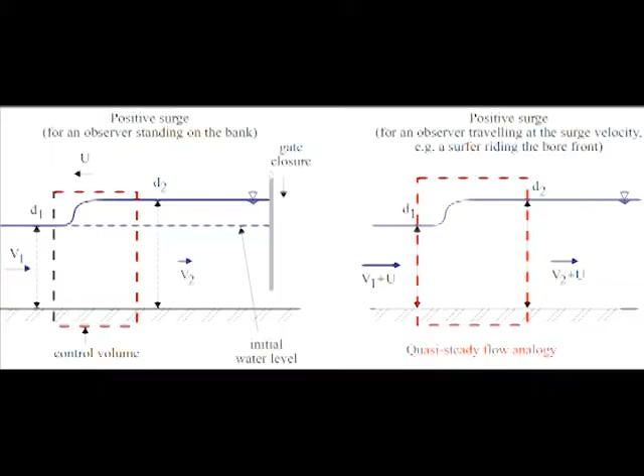may be analyzed as a quasi-steady flow, considering a positive surge propagating upstream against an initially steady flow, for example following downstream gate closure. The surge is an unsteady flow for an observer standing on the bank, on the left, but it is seen by someone traveling with the surge at the celerity U as a steady flow, a quasi-steady hydraulic jump.

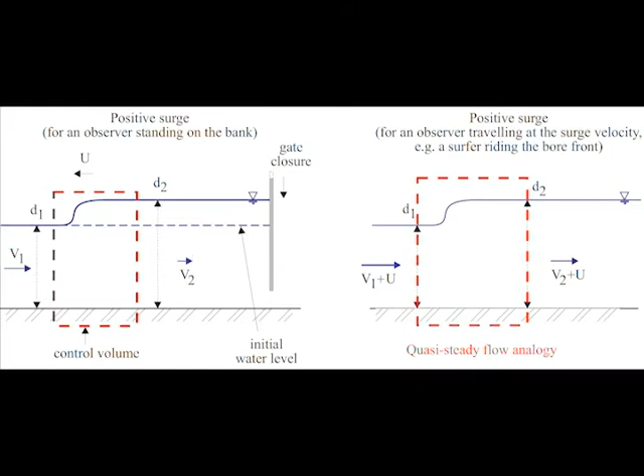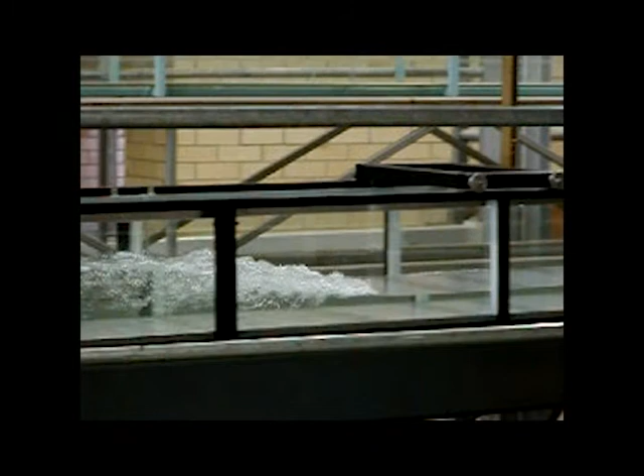The quasi-steady flow analogy is illustrated in the following short movie in a laboratory. In this laboratory experiment, the last frame of the movie shows a side view of the positive surge, which is nearly identical to a side view of a hydraulic jump.

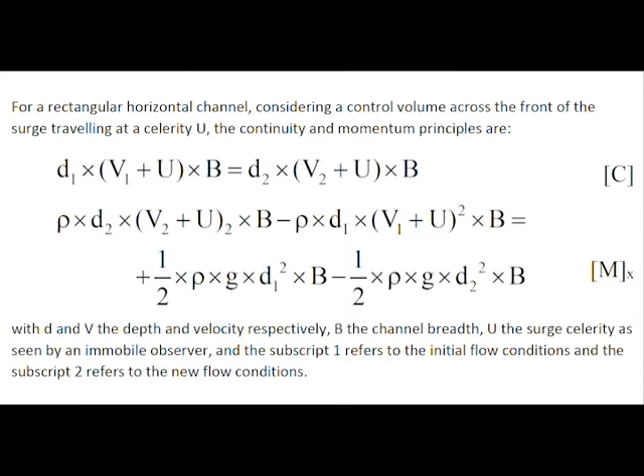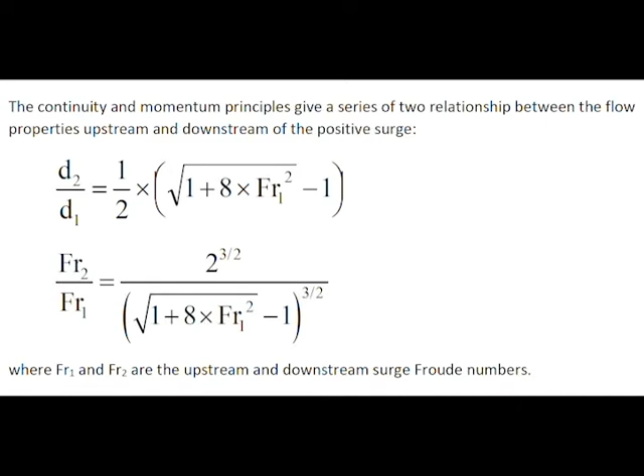For a rectangular horizontal channel, considering the control volume across the front of the surge traveling at a celerity U, the continuity and momentum principle can be developed. They give a series of two relationships between the flow property upstream and downstream of the positive surge, that is the flow property before and after the bore. In this relationship, the Froude numbers are defined in terms of the surge propagation in using the relative surge celerity.

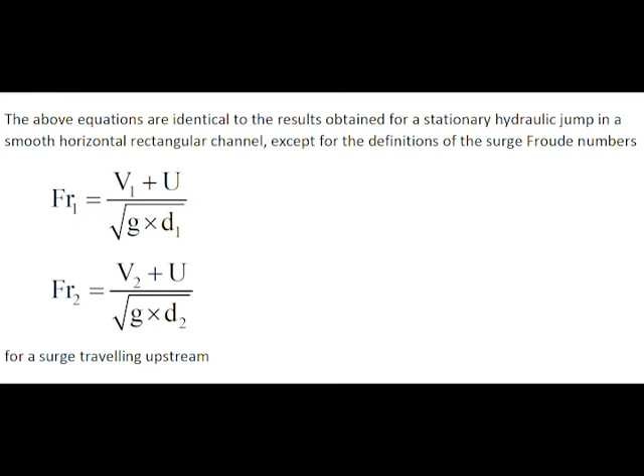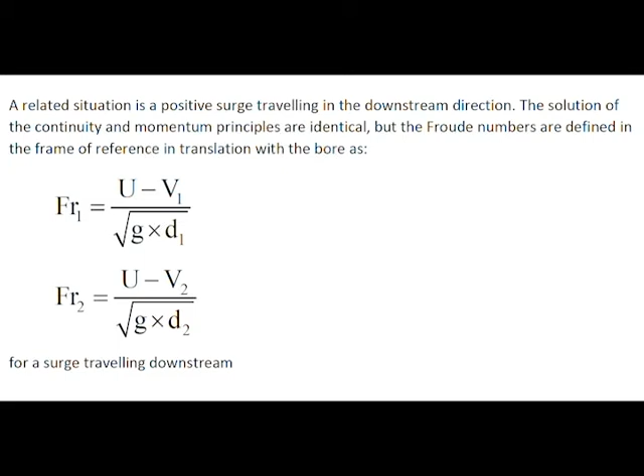A related situation is the positive surge traveling in the downstream direction. The solutions of the continuity and momentum principle are identical, but the definitions of the Froude number are corrected to be defined in the frame of reference in translation with the surge.

The continuity and momentum equations give a system of two equations with three unknowns: the new flow condition, d2 and V2, and the surge celerity, U. A further equation is required, that is a boundary condition, for example, the new discharge after gate closure.

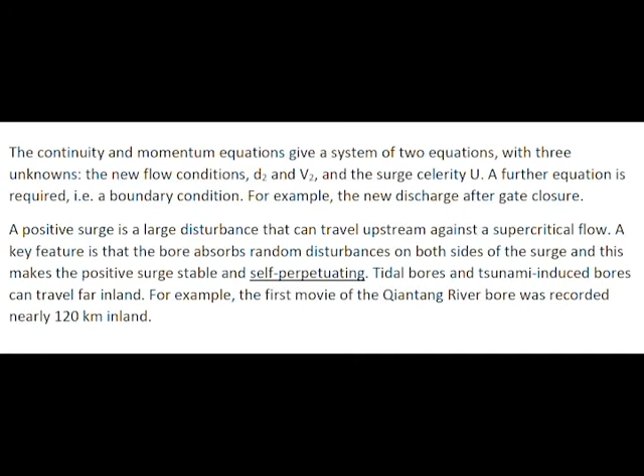A positive surge is a large disturbance that can travel upstream against a supercritical flow. A key feature is that the bore absorbs random disturbances on both sides of the surge, and this makes the positive surge stable and self-perpetuating. Tidal bores and tsunami bores can travel far inland. For example, the first movie of the Qiantang River bore was recorded nearly 120 km inland.

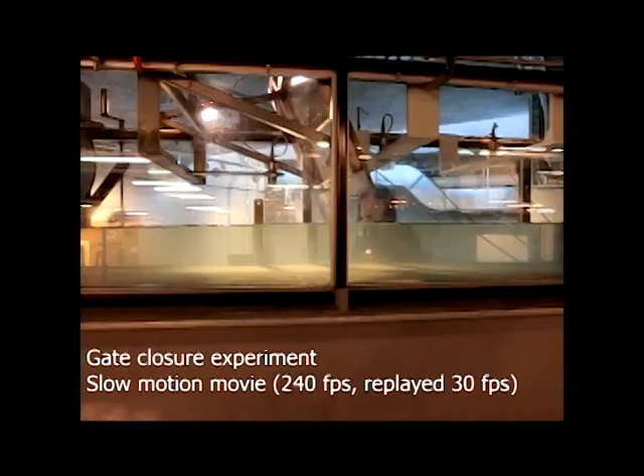The above development assumed an idealistic positive surge generation. In practice, the generation of the positive surge traveling upstream is a very turbulent transient. It is associated with a rapid acceleration of the surge leading edge immediately after gate operation, followed by some deceleration before the bore celerity becomes nearly constant. Such a transient turbulent process cannot be modeled with simple one-dimensional flow theory.